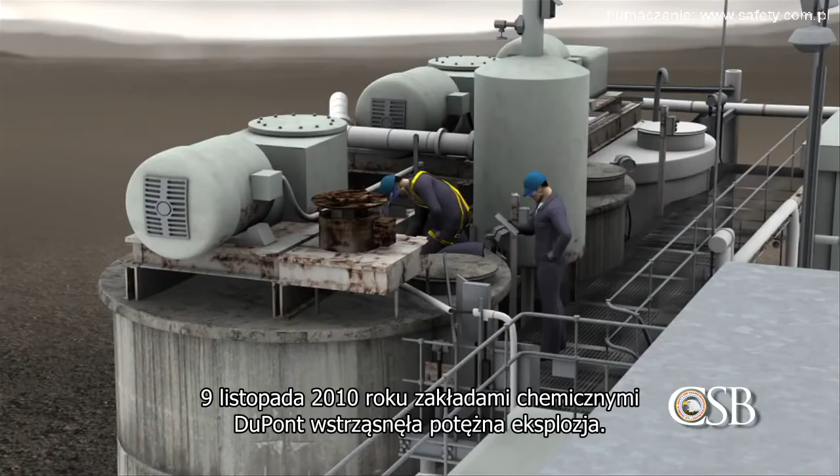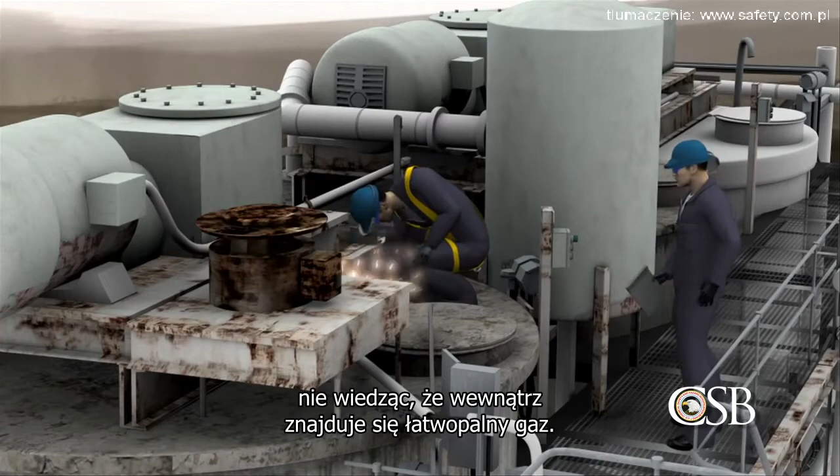On November 9, 2010, a powerful explosion shook the DuPont chemical manufacturing plant in Tonawanda, New York, a suburb of Buffalo. A contract welder was performing maintenance work on a tank that, unknown to him, contained flammable gas. The explosion blew the top off the tank, throwing the welder to the ground and killing him instantly. A second contract worker was burned.

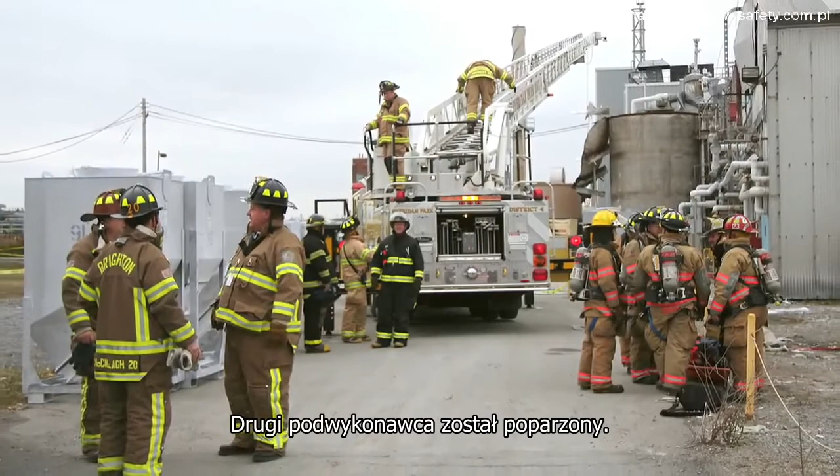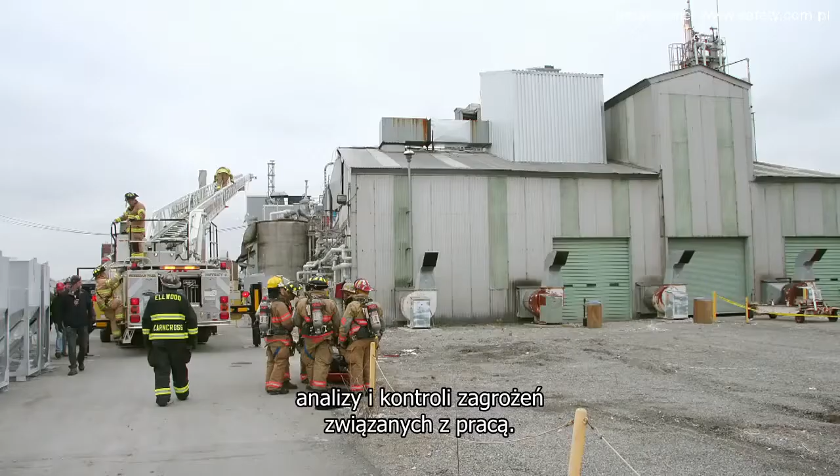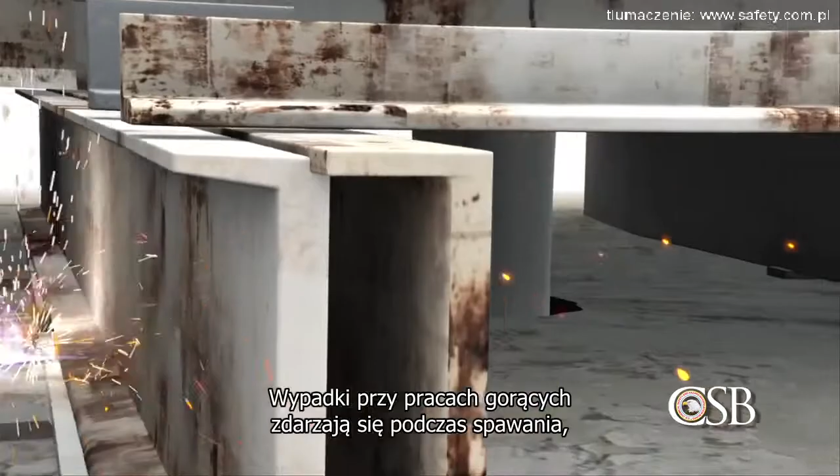The tragic explosion at the DuPont facility exposed weaknesses in how process hazards were analyzed and controlled. The result was the death of a welder in a preventable hot work accident. Hot work accidents occur when workers are welding, cutting, or grinding near flammable vapor, and were the focus of a 2010 CSB safety bulletin. Deficiencies in the safety management of hot work were among the causes of the tragedy at DuPont.

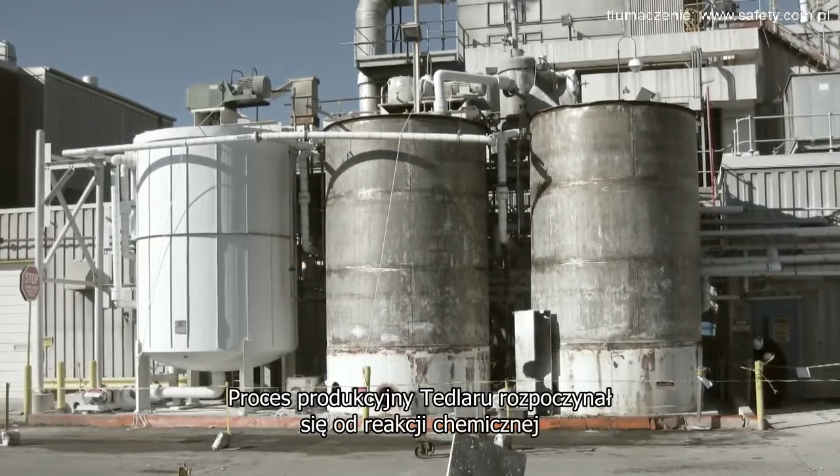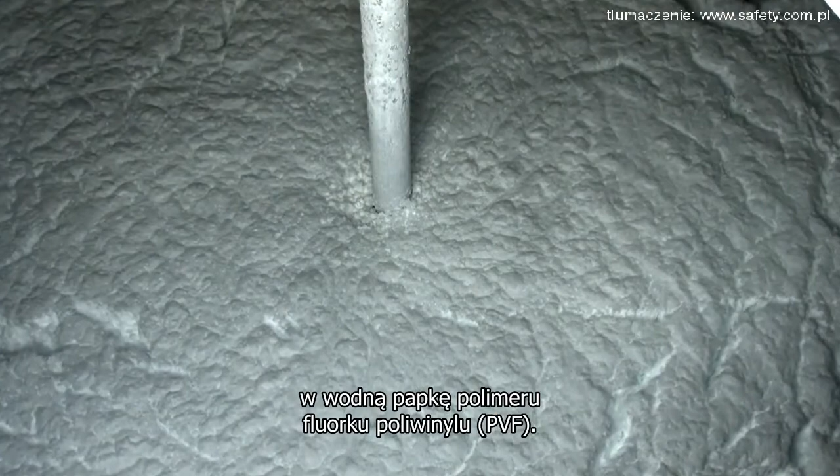DuPont's Tonawanda facility manufactures a polymer known as Tedlar, used in solar panels, and Corian for use in countertops. The process of producing Tedlar began with a chemical reaction to convert flammable vinyl fluoride gas into a slurry of polyvinyl fluoride polymer, or PVF, in water. The PVF slurry then passed through separators.

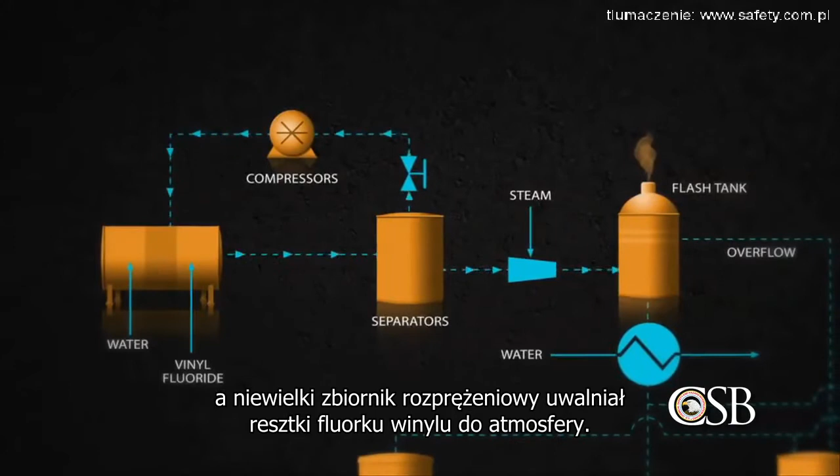Compressors recycled unreacted vinyl fluoride gas into the process, while a small flash tank released residual vinyl fluoride into the atmosphere. Finally, the slurry was transferred to one of 3 insulated holding tanks, usually tank number 3. Tanks 1 and 2 were reserved for slurry overflow. Tank 1 normally remained empty.

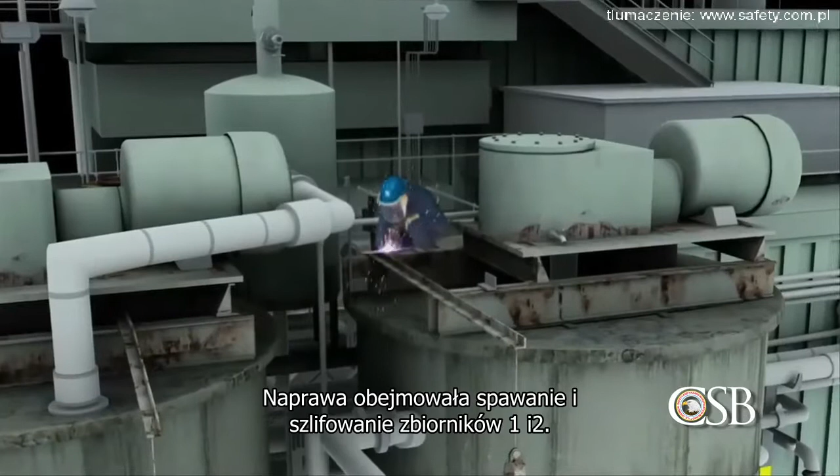On October 22, 2010, the Tedlar process underwent a planned shutdown, during which workers removed the asbestos insulation on tanks 1 and 2. Removing the insulation revealed that the agitator supports for the tanks were heavily corroded. DuPont directed contractors to repair the supports, which would involve welding and grinding on tanks 1 and 2. The hot work on tank 2 occurred during the shutdown without incident, but the repairs on tank 1 were delayed while parts were ordered. DuPont personnel determined that it would be safe to perform hot work on tank 1 after the restart.

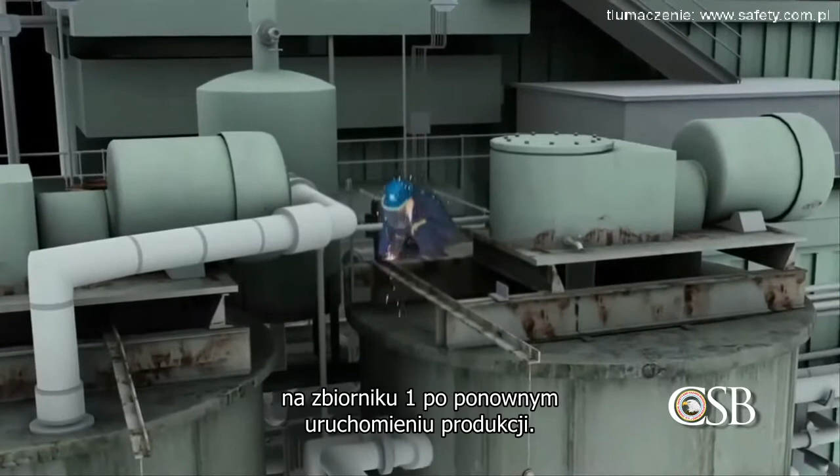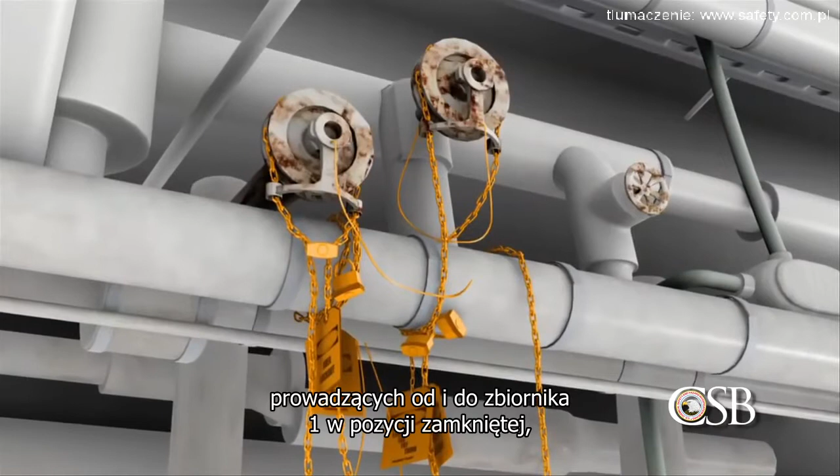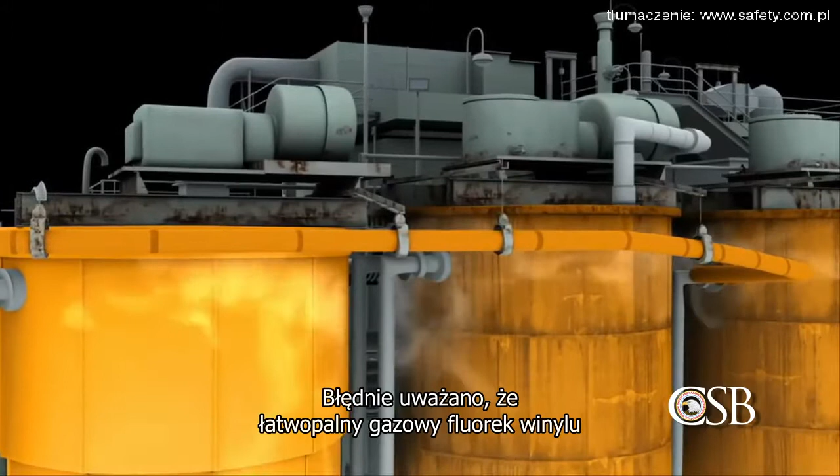On November 7th, DuPont operators locked all 5 valves leading to and from tank 1 in the closed position in order to stop potential slurry flow. The tank's agitator motor was also locked out. However, DuPont personnel did not block the flow of gas inside the overhead piping, or overflow line, that connected the vapor space of all 3 tanks. They mistakenly believed that flammable vinyl fluoride gas could not reach any of the slurry tanks.

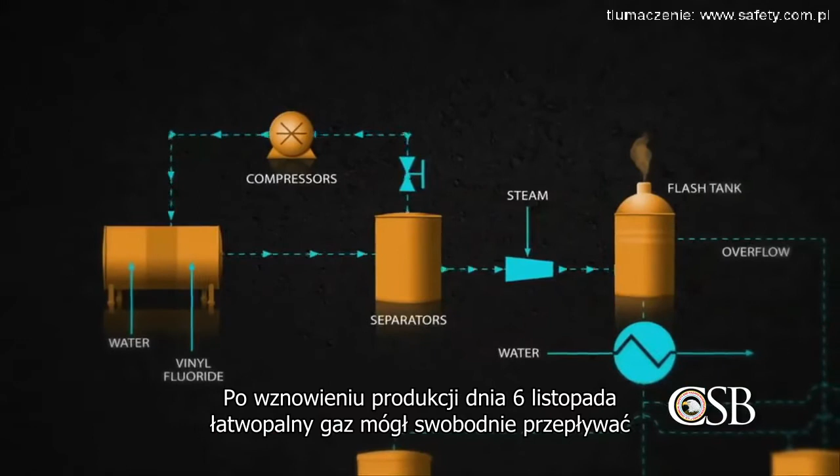But the CSB investigation found that even in normal operations, vinyl fluoride was not completely removed from the slurry and was always present in the slurry tanks in varying amounts. When the process restarted on November 6th, the flammable gas was able to travel from tanks 2 and 3 through the open overflow line into tank 1.

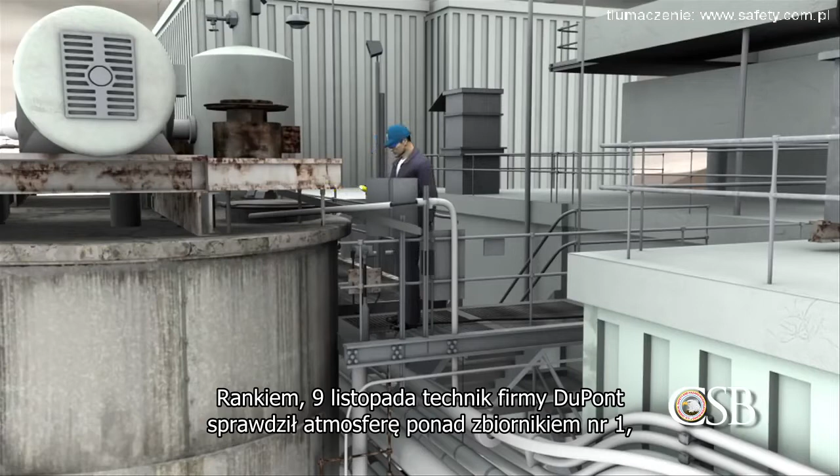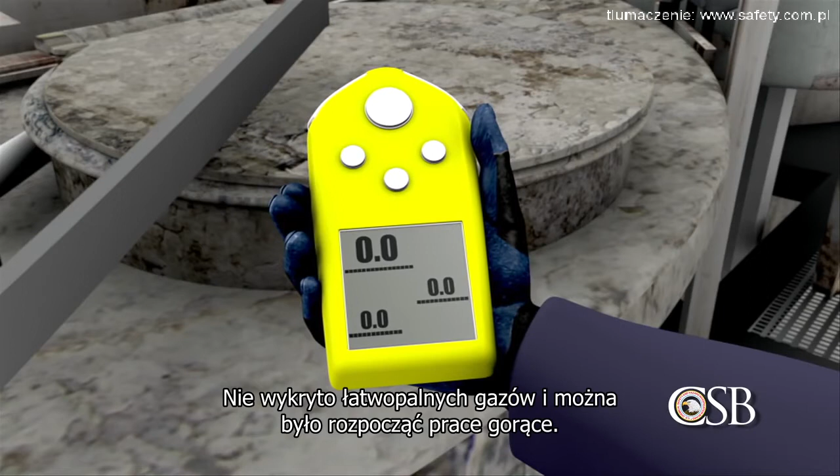On the morning of November 9th, a DuPont technician tested the atmosphere above tank 1, where welding would later take place. There were also 2 continuous air monitors in the vicinity. No flammable gas was detected, and the hot work was cleared to begin. But no testing was done to measure or monitor the atmosphere inside the tanks, where, unknown to the contractors, the flammable gas was at dangerous levels.

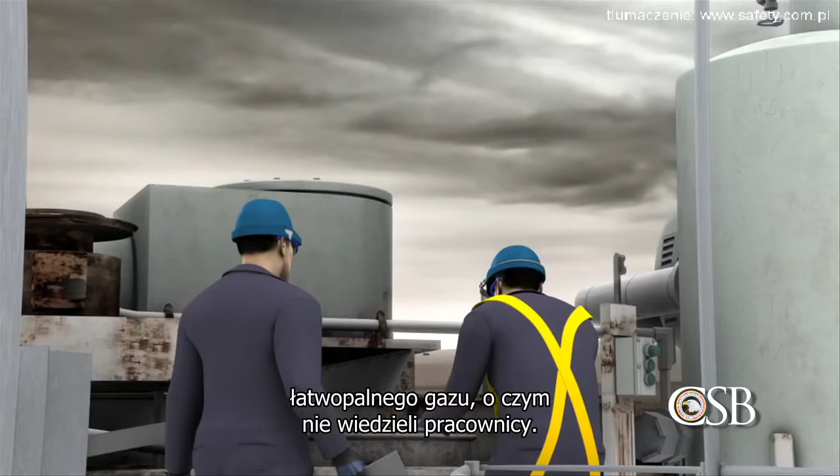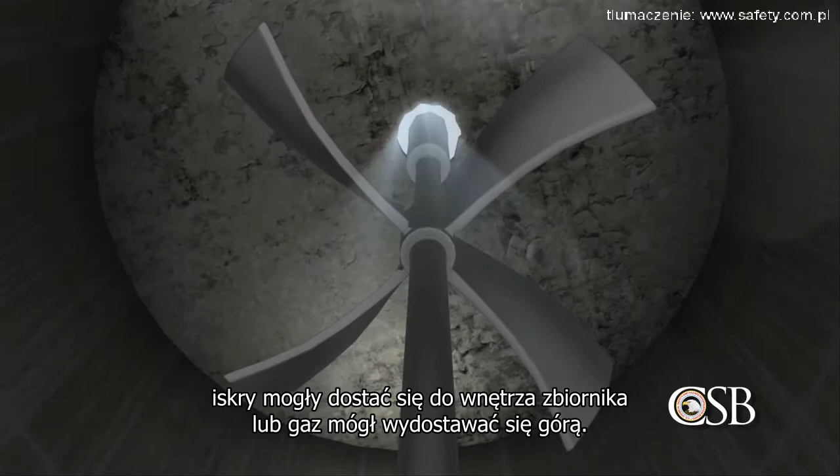Around 9 a.m., 2 contract workers began welding and grinding on tank 1. The welder connected his safety harness to the tank's agitator support and worked on top of the tank as the foreman looked on from the nearby catwalk. At approximately 11 a.m., the welder was repairing corroded portions of the agitator support beams directly above the flammable gas. A hole around the agitator shaft may have provided a pathway for ignition. Welding sparks could fall into the tank, even as flammable gas might drift upward toward the sparks. The ignition of the vinyl fluoride caused a powerful explosion.

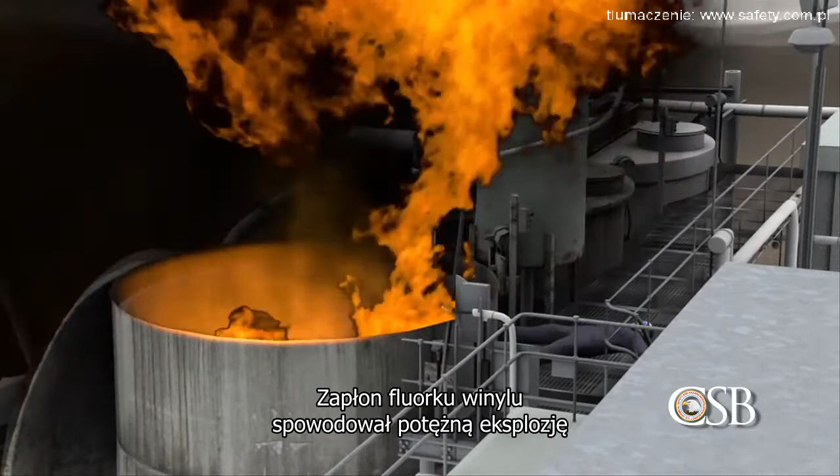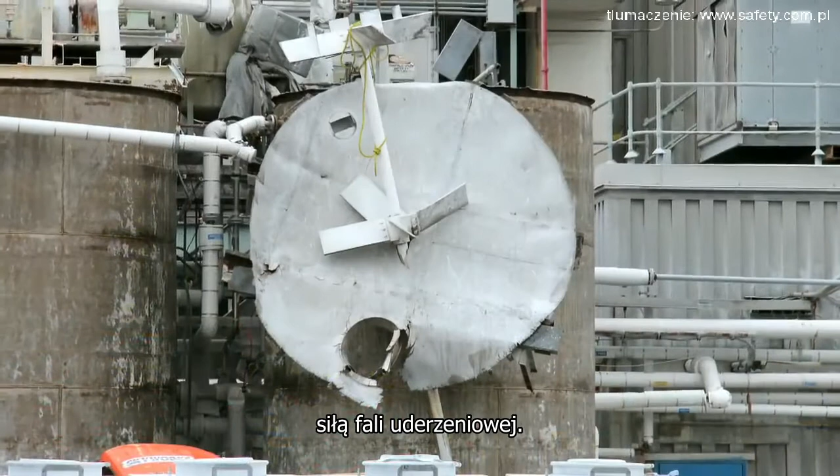The force of the blast blew the top of the tank almost completely off. A flash fire erupted that consumed the flammable gas and quickly burned out. The welder was thrown to the ground, killed instantly from blunt force trauma. The foreman's face and arms were burned.

Mark Wingard was a member of the CSB team that investigated the accident at DuPont. Had DuPont technicians tested Tank 1 for a flammable atmosphere, they would have known that any hot work presented a serious explosion hazard. But plant engineers did not realize that significant amounts of flammable gas could be present in the slurry tanks, and the testing was never done.

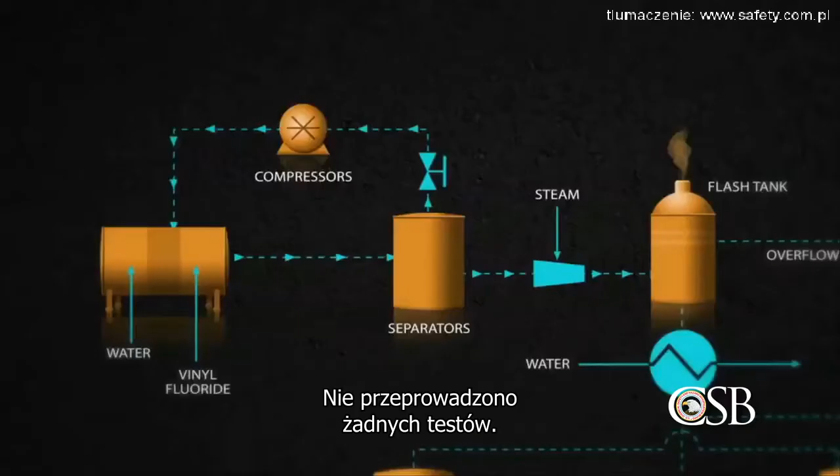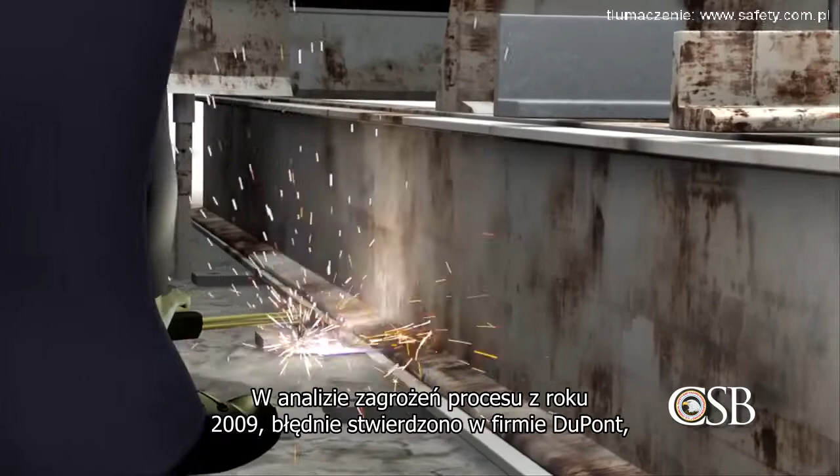DuPont regarded most of the Tedlar production process as covered under the OSHA standard for Process Safety Management, or PSM, and therefore subject to stricter operating and maintenance requirements. But DuPont personnel did not include the slurry tanks in the facility's PSM program. In a 2009 process hazard analysis, DuPont erroneously concluded that flammable vinyl fluoride gas could never reach the tanks in dangerous quantities.

We found that the contractors did obtain hot work permits for welding on Tank 1, but those permits were authorized by DuPont employees who were unfamiliar with the specific hazards of the process, and the permits did not require testing the atmosphere inside the tanks.

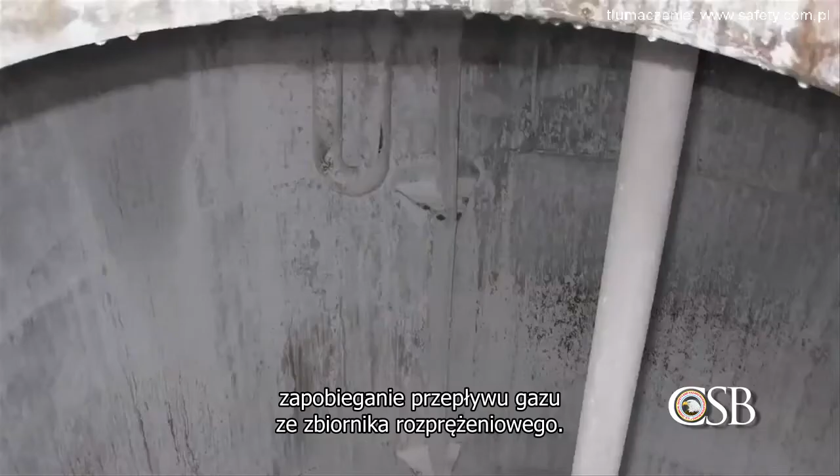Two additional factors may have contributed to the tragedy. Prior to the explosion, DuPont personnel had discovered that slurry tank number 2 had a hole in a liquid trap, which was designed to prevent the flow of gas from the flash tank. Without a liquid seal in the trap, there was an additional pathway for vinyl fluoride gas to flow into the tanks. However, this hazard went unrecognized, and DuPont engineers concluded that it would be safe to return the tank to service. No formal management of change review was conducted.

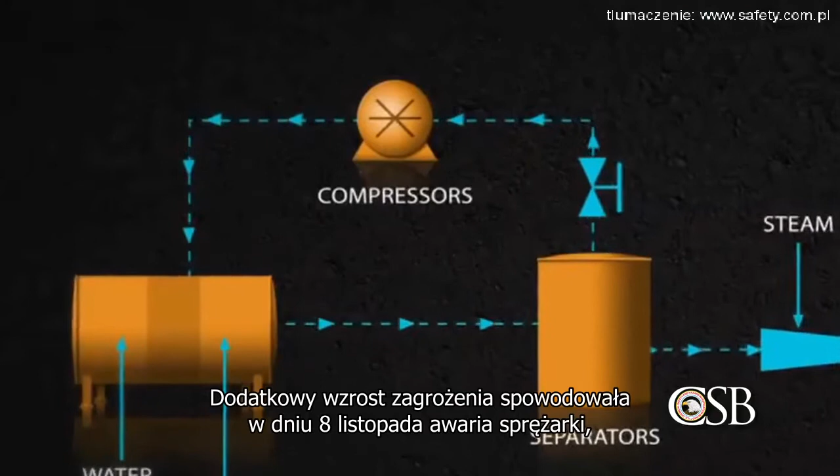Further adding to the danger, on November 8th, there was a malfunction in a compressor used to strip vinyl fluoride gas from the PVF slurry. As a result, the slurry contained more than the normal amount of vinyl fluoride. Once again, DuPont personnel did not formally analyze the safety impact of continuing to operate with a malfunctioning compressor.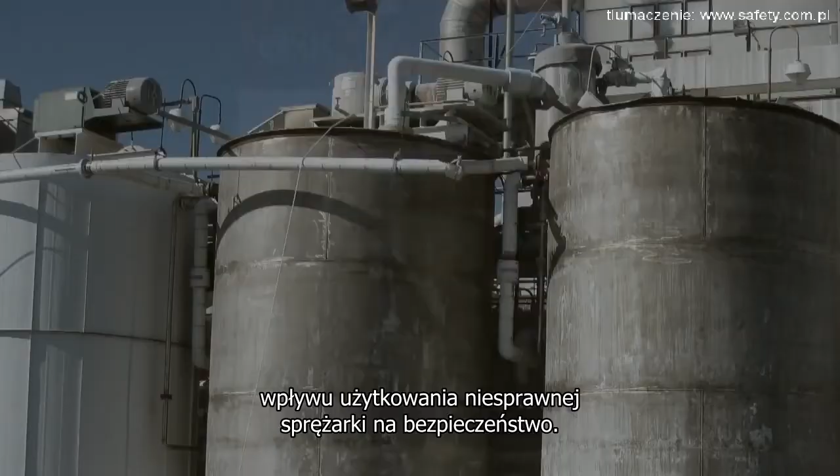In its final report, the CSB recommended that DuPont revise its corporate policies to require atmospheric monitoring inside tanks before and during any hot work. And the board recommended that DuPont require all process piping, including vent lines on tanks, to be positively isolated before authorizing any hot work.

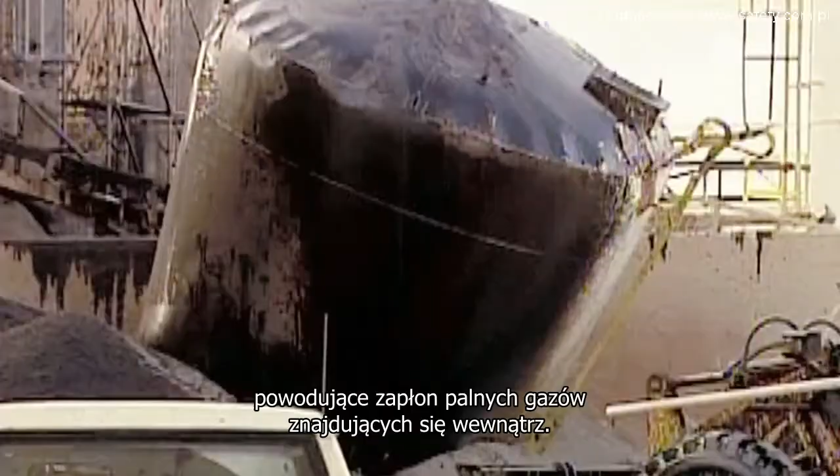In our 2010 Hot Work Bulletin, the CSB identified 11 accidents similar to the one at DuPont. All involved hot work on tanks that ignited flammable gas inside. In all cases, the CSB found that there was not an adequate system in place for monitoring the atmosphere for flammable vapor where hot work was to occur.

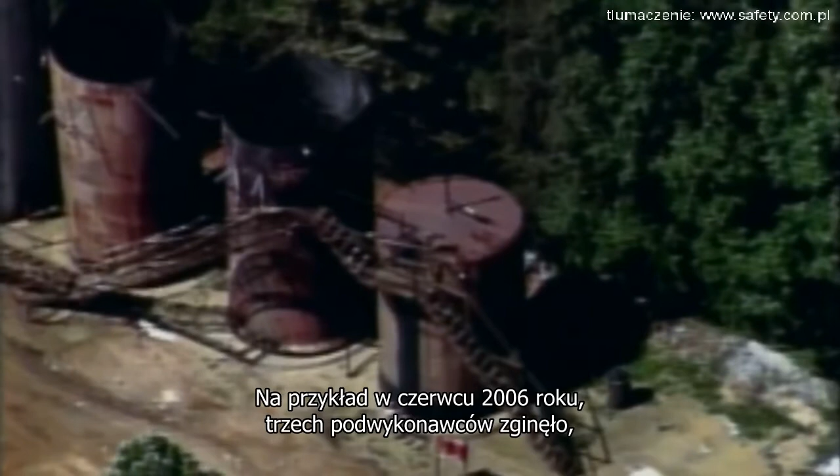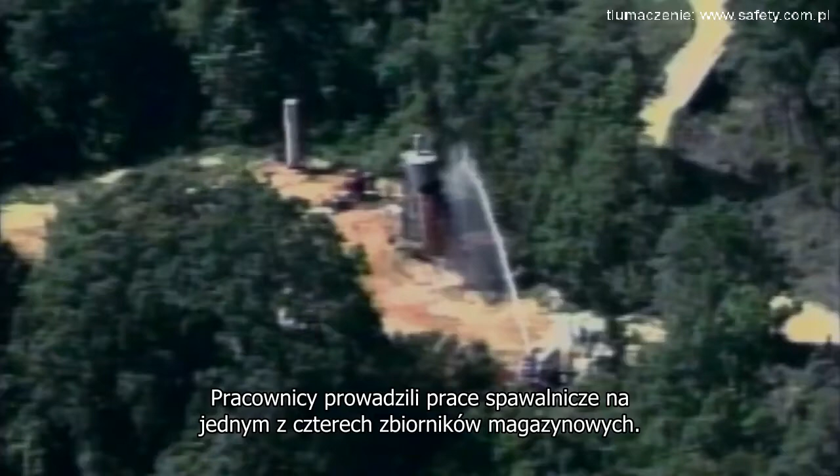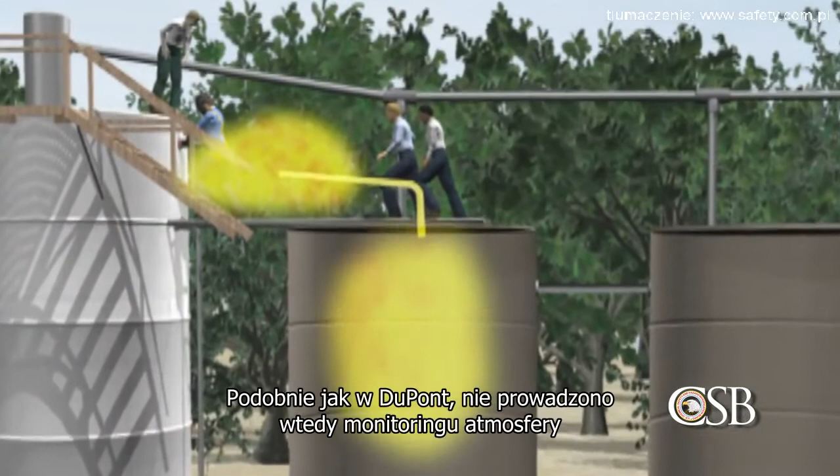For example, in June 2006, 3 contractors were killed and another seriously injured in an explosion at the Partridge-Raleigh oil field in Raleigh, Mississippi. The contractors were welding on one of 4 storage tanks when welding sparks ignited flammable vapor flowing from an adjacent tank. As was the case at DuPont, no monitoring was performed to test for flammable gas inside the tank, and piping to the adjacent tank was not isolated.

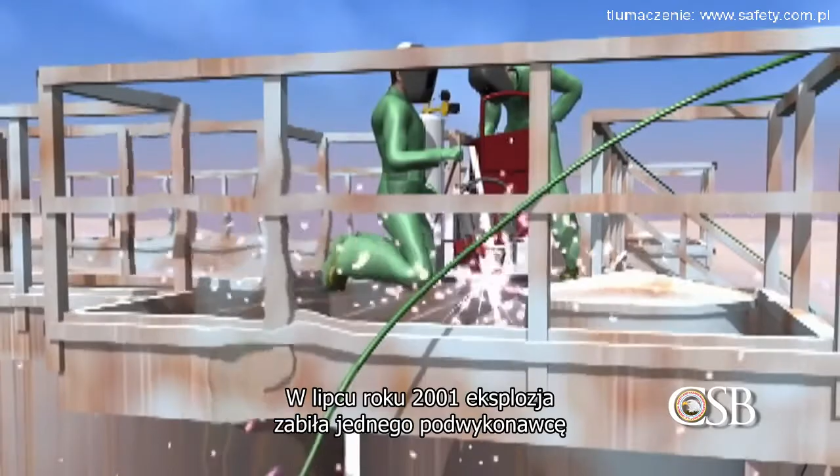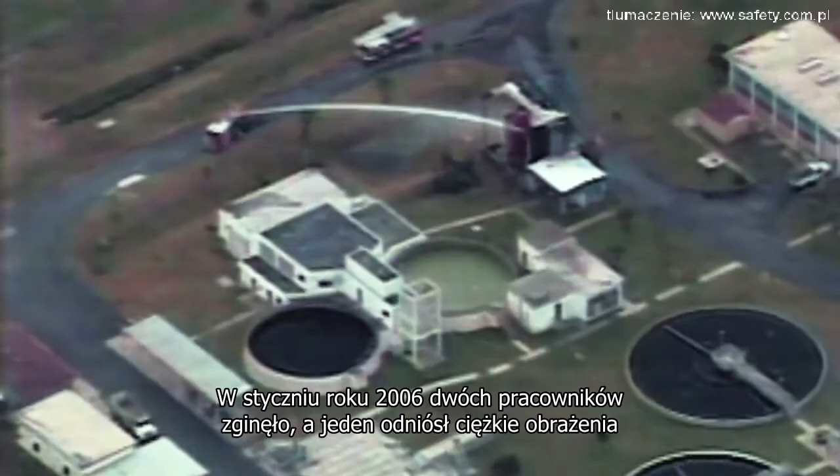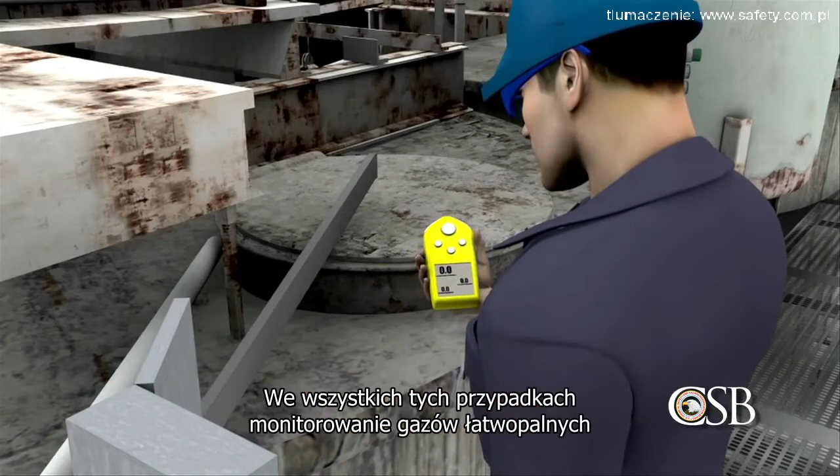In July 2001, an explosion killed 1 contract worker and injured 8 others when welding sparks ignited flammable hydrocarbon vapors in a large sulfuric acid storage tank at Motiva's Delaware City refinery. And in January 2006, 2 workers died and another was seriously injured in an explosion at a municipal wastewater plant in Florida when hot work ignited vapor inside a storage tank of highly flammable methanol. In all of these cases, combustible gas monitoring either was inadequate or wasn't performed at all.

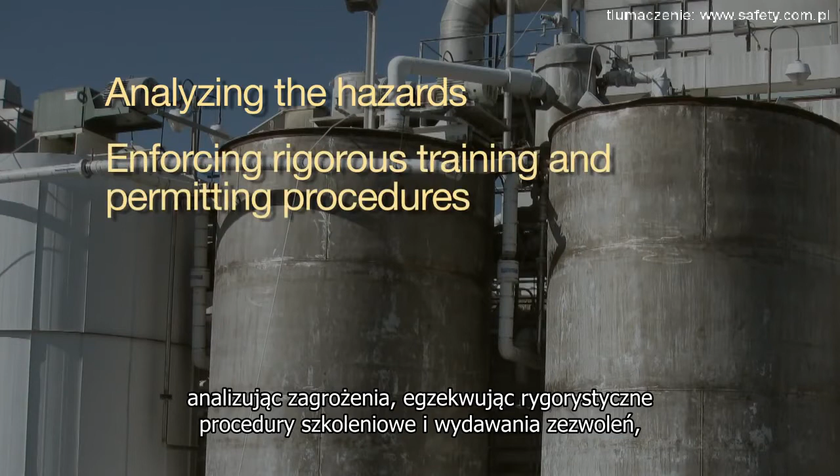In its 2010 safety bulletin, the CSB said companies can prevent hot work accidents by analyzing the hazards, enforcing rigorous training and permitting procedures, constantly monitoring the atmosphere for flammables, and avoiding hot work in favor of non-spark-producing methods whenever possible. Hot work is often seen as a routine activity, but it can prove deadly if fire and explosion hazards are overlooked.